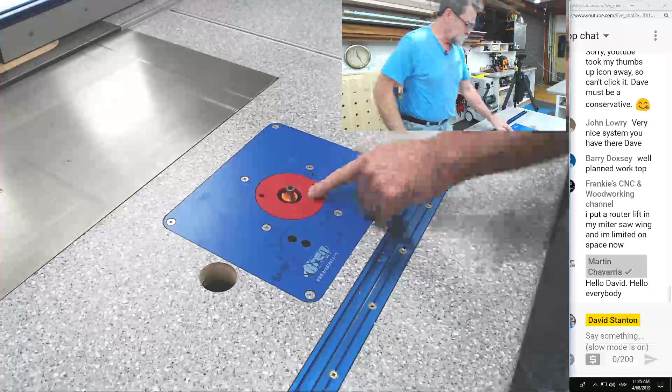So I thought, well, how about we do something that's not going to restrict me? So I came up with the idea of that. And you're going to say, yeah, good on you, Dave. What is that? Well, let me just check that I've got all of the slots cleaned out. Yes, they are. So this is a rotating dust shroud that locks into the top of this. Now, undo that one, take her out, pop this one in, and lock.

Now, that will move wherever I want it to as a dust shroud as I'm putting a large piece over. See how it just moved out of the way then? Wherever I put this, it will follow. So as I'm coming past, beautiful. So the cutter is turning this direction. And you see how when I pushed it up against there, this is following against the edge. So it's restricting the amount of opening. It can go to there, of course, and that would allow a little bit of dust to go out.

But as soon as I move this around, I'm back to there. And how nice is that? So that's one. That's for 180 degrees. Now, the one I'm going to demonstrate on, I thought it might be an idea if instead of just doing 180 degrees, we do one at 120 degrees. Now, the reason that one's there is if I want to go into internal corners. So let's take that out.

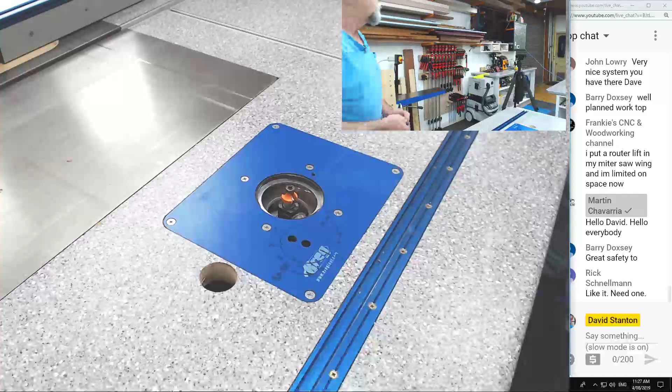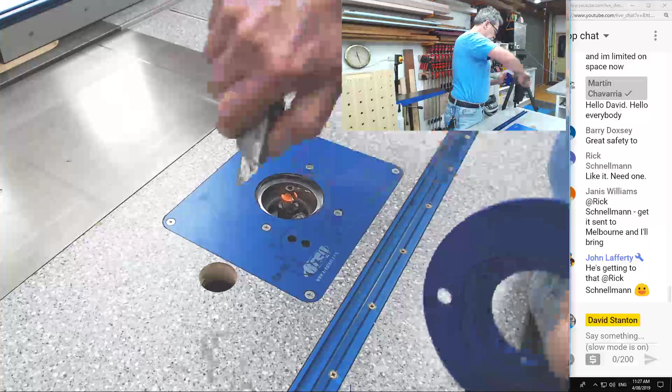And I'm just checking this. Sometimes the printing is leaving, see, just here, you may or may not see it, there's just that little bit of residue from the print left there. And that's fine. I just want to get rid of it. Where's my knife? I'm just going to get a Stanley knife. Got it. Okay. So here we go. As I say, every now and then, with any 3D printing, you might get a little bit of residue in there. That's fine.

So now I can drop that in here, get the clamp or the tool that locks it up, tighten her up. Beautiful. How cool is that?

All right, now, where's that stick that I've got? This is what I'm talking about. 90 degrees. I want to follow there and then back out there. Well, this one would have held me out. There's no way I could have done it. But this one, I can slide in and then back like so. And I'm going to demonstrate it.

So let me get my stuff together here. I've already set that at the right height. I'll make sure that the router is going to work all right. Yes, going to work fine. And how about we turn the dust extractor on in the right area?

Are you enjoying what I'm doing today? Like, I have to apologize for being crook. You know, it's just one of those things I had no control over.

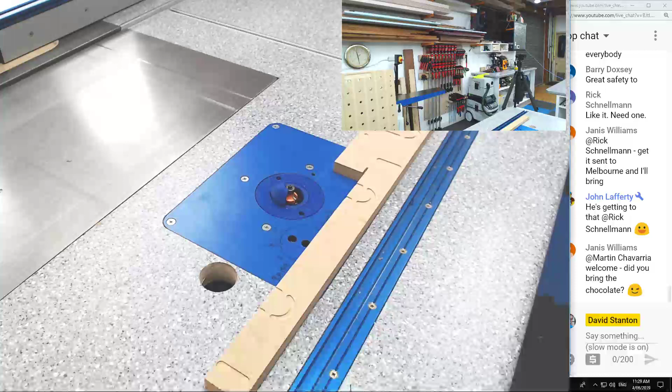I'll make sure that I've got the dust port open there. That's closed. All that's closed. And that one's open. Good. So I'll start up the Dusty, as you know I do with this thing. And I should really have something under that, because that one is open to the cabinet. I'll just check that.

What do we got? Oh, I should have really prepared this, shouldn't I? There we go. I don't know if that's going to go anywhere, but there you go. This one's going to there, and I'll turn the other one on as well. Give me a second. And I think I'll hook into this one, open that, and close that. That should work. Turn her on. Yeah, that's working great. All right. A lot of mucking around, wasn't it?

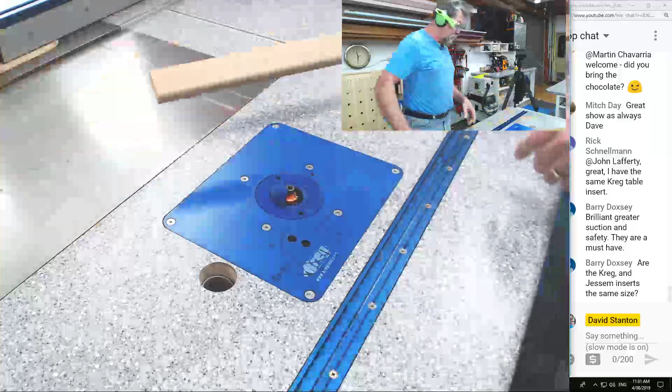Here we go. Put the ear muffs on. Beautiful. Make sure everything's out of the way there. Now, I'll let you know, I haven't used it yet. So this is cool. See how we go. There's the roundover. How nice is that? It works. What can I say? Let's turn some things off.

Beautiful. All right, so now I'm going to spin this around again to there, and hopefully that'll work, and switch the cameras back to the main camera and the chat and do the transition. There you go. Easy, easy, easy little thing.

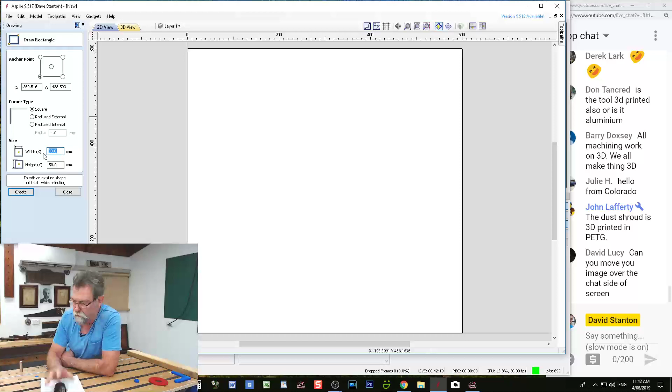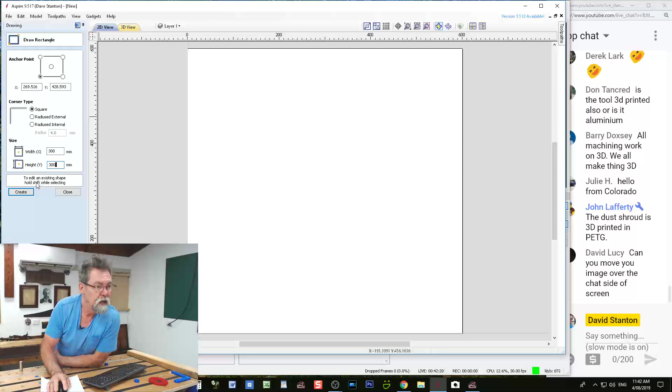Now I want to show you how easy this is. Let's create a rectangle. So I'm going to left click on the mouse, and I'm using a PC, not Apple. So I'm going to left click on create a rectangle, and it's saying all these coordinates that it wants to do it at. I don't want to put it there. I want the rectangle to be, let's say, 300 millimeters wide, and also 300 millimeters high. Okay, and I'm going to click here, and there it is. We'll close that. So now I have this vector, and if I left click anywhere else on the screen,

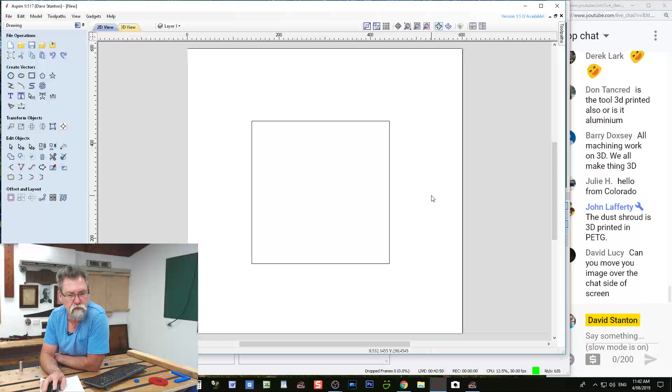And can you move the image over the chat side of the screen? I possibly could, but not right at the moment, David. I've got it set up to run as it is. Can you see it all, or is it not coming through for some strange reason? I wanted to have it so that we had the chat on the right-hand side like normal, and Aspire is still filling everything, and then we've got the picture underneath. It was working earlier when I did a quick recording, so hopefully it works.

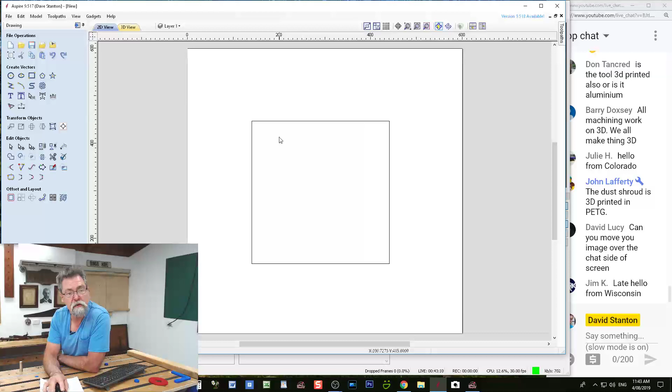So here we go. We've got this square. Now, let me get this back over here again so you can see what I'm talking about. I did mention this circle coming into a rectangle, and that's an awkward one to line up manually to get the vectors to actually lock onto each other.

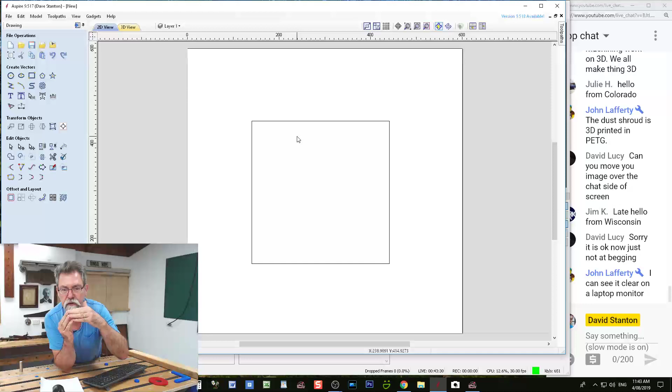It's okay now, just not at the beginning. Okay, not at the beginning. I can see it clear on a laptop monitor. Okay, all good.

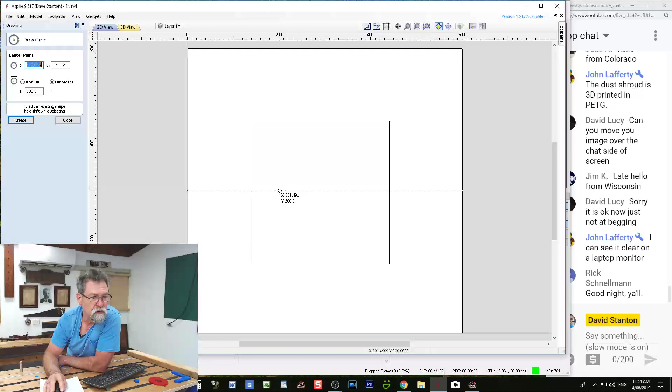So here we go. Now I'm going to create a circle. So left click on the draw a circle tool, and it's got a diameter of 100 millimeters. And again, it's got coordinates there that if I really wanted to be precise, I could use. But what I'm going to do is some smart snapping. I'm going to left click there. Now it's not over far enough, so I'm going to get rid of that and do it again. How I get rid of it is push the delete button, and it's gone. Go back to the circle, and I'm going to come in a little bit closer. Going to click there. Now I've got an intersection. So put the vectors to sleep. So I have a circle and a square.

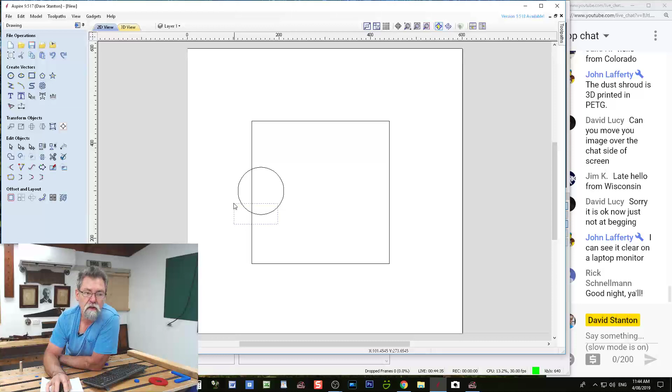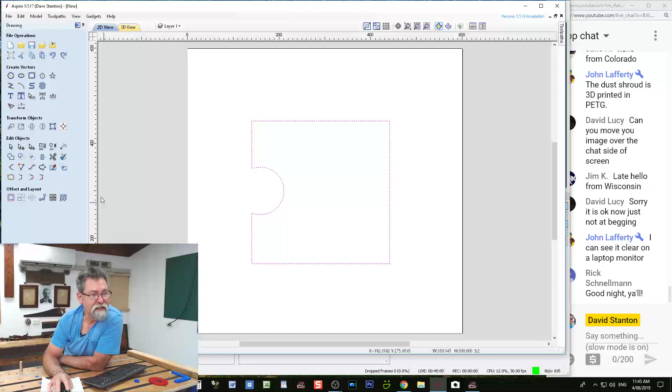I want to create this as one vector. So now what I can do is highlight those two vectors by left clicking from the right and dragging over the two vectors. And so they've both been woken up. Over here, we have subtract second selected vector from the first. If I left click that, it's made that one vector. It's welded it together, got rid of all this other stuff that I didn't want. Okay, now what we're going to do is the tool that I was talking about. This guy down here is the fillet.

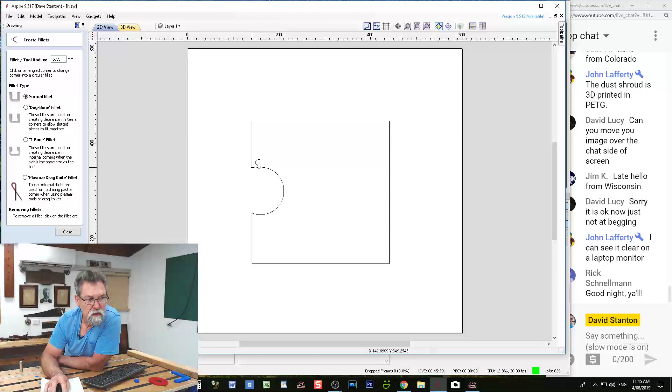I left click on that, and I'm just going to muck around with normal fillets at the moment. So here is the radius. So let's make that, say, 6 millimeters, or 6.35. Let's make it a perfect 1/4 inch, which was the radius that I was using for the router cutter. Now all I do is come down, see that little arrow pops up? How cool is that? Down here till I see the arrow, and there it is.

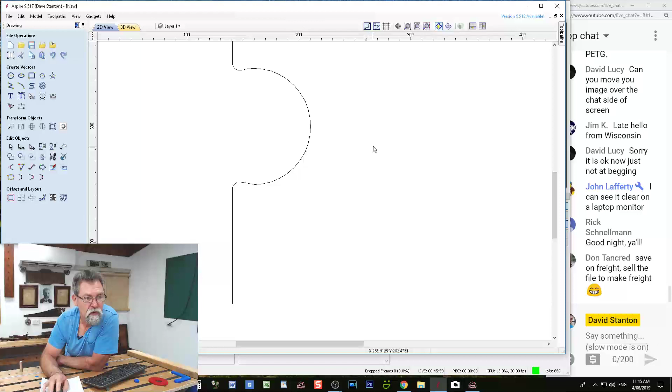Now, I can get rid of it by left clicking again when the cross is on it, and it says, goodbye, I don't want you there anymore. But I can come back and let's put it back on. And we can see when I increase the size of what I'm doing here, that was a whole lot easier than trying to find the tangent and the perpendicular from there and try and get an origin point for a circle there. Fillets are my new best friend.

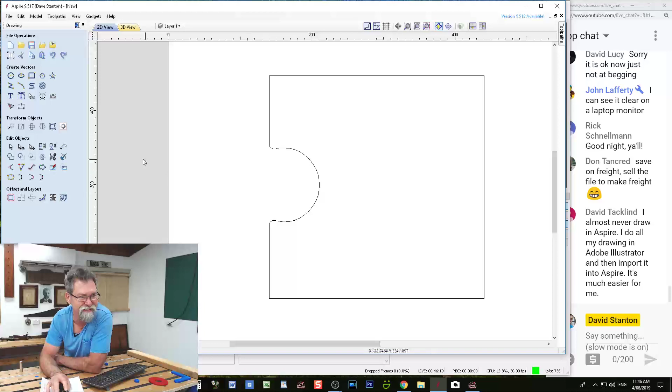So now I want to put a fillet here too, because I'm thinking, you know, that looks okay, but how about we do something of a good size? So let's do something close to 1 inch, 25 millimeters, and then come up to here and say, there's the fillet. Now a lot of people are going to say, you know what? A lot of things,

this is a lot of mucking around, but see, I can now punch this out on the CNC, and I can use that as a template for the traditional way of doing things by cutting it out with a jigsaw or a bandsaw, and then gluing the template or sticking the template down onto my workpiece, which might be 2 inches thick, and then run it over the router table using John's dust shroud with a pattern follower. So double bearing spiral up cutter is what I use for that kind of stuff.

And again, I keep telling people, it is a router. It's a woodworking tool, except instead of doing this, holding on to it, I'm using this and I'm directing the machine to do it via the computer, the stepper motors, and the router there. So it's just a different way. It's still another tool. Okay.

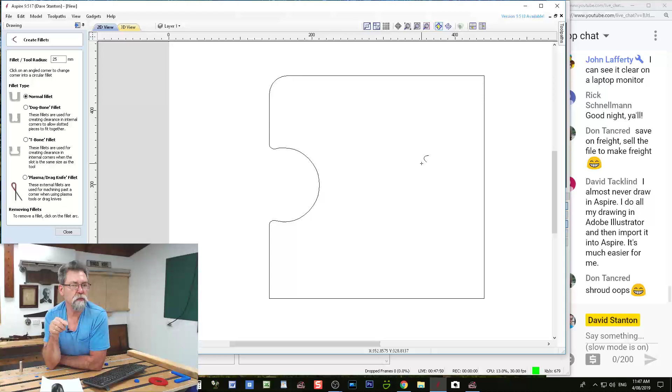All right, I do all my drawings in Adobe Illustrator and then import into Aspire. It's much easier for me. Well, I get that. It's what you're comfortable with. But as I said at the beginning of the show, I was given Aspire by Vectric because I am labeled an influencer. And so this is the thing that I'm learning. So I'm just sharing with you as I'm crawling. I don't learn this very quickly, but it's so much fun learning it.

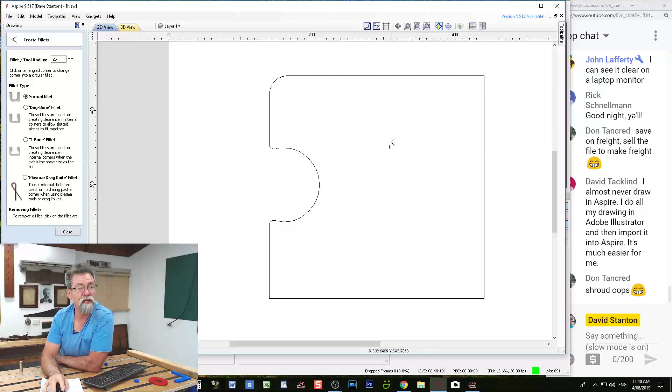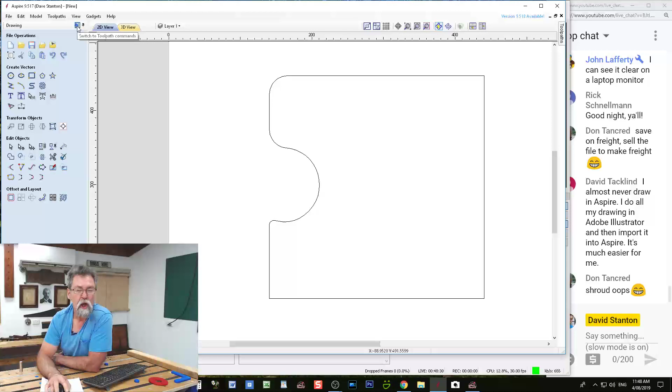All right, let's do another one. Let's get rid of that one and do a monster 25 millimeter there. How cool is that? That was just so easy. Now, let's close. Left click on the close, and we're going to go from CAD, which is computer aided design, over to the other side, which is computer aided machining, CAM. So there we go. This is what's called a vector now. So I have that vector, all continual dotty marching ants lines.

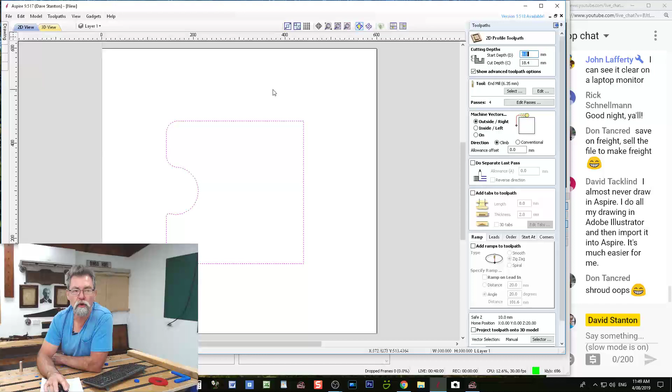And let's say I want to cut it out. So I'm going to left click on a profile toolpath, and I want to go 1/2 millimeter through the job. Remember, this board, my workpiece that I'd be cutting this out of, is 18 millimeters thick. So I've told it to go 18.4, and I'm going to use a 6.35 millimeter cutter, which is a 1/4 inch end mill. Basically, it's a spiral up. And I'm going to cut on the outside of the vector. I'm going to go around the outside.

And I'm going to go in this direction, which is called climbing, not conventional. If I was using a handheld router, I would go this direction because the cutter is turning this direction, pushing into the job. But going climb, what happens is, as I'm going this way, it's wanting to race ahead, but it can't because the machine's got a hold of it.

But it's a much cleaner cut. As the cutter is turning down, it's pulling the timber down into itself. So basically, the job is its own sacrificial piece. It's not tearing out the other side. So this is another advantage of the machine.

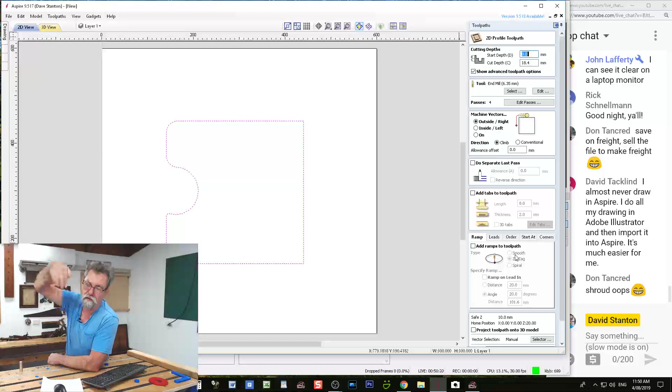So I'm not going to do any offsets. I'm not going to do a separate pass at the end. I'm not going to add any tabs at this stage because this is only a demonstration. I'm not going to ramp it, which means the cutter, instead of just going and then doing a cut, travels in at an angle and then does the circle and then another circle.

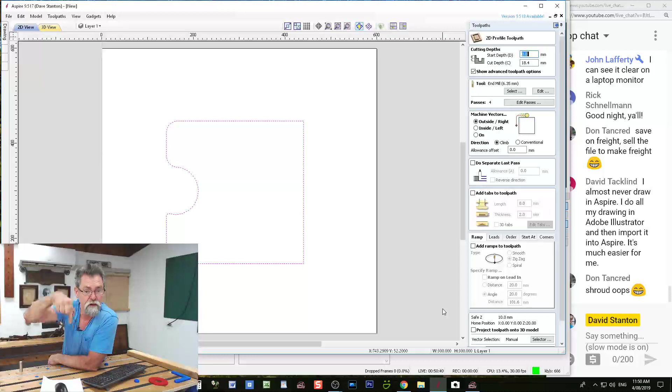I've told it to do 4 passes. Its safe Z position is 10 millimeters above the job, which means the router will come up out of the job and give it 10 millimeters clearance above the job before it moves to the next part to go down, so you don't drag it through and destroy the job.

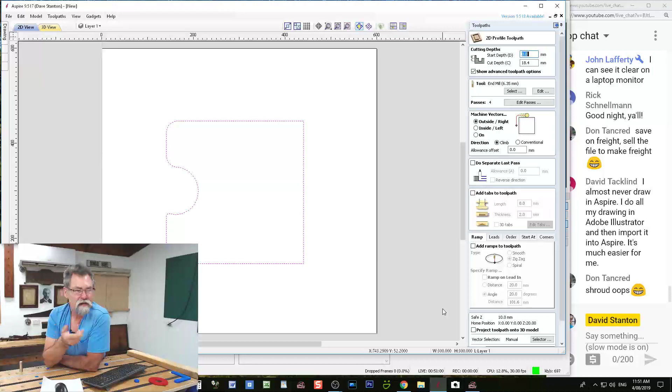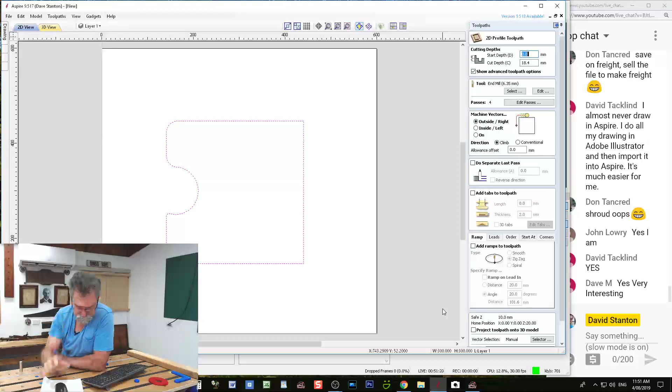Are you finding this interesting? I know some people will be going to sleep and they'll say, this isn't woodworking. I understand that. It's basically going from steam engines to electric. It's progression. Why not? Okay, John, thank you. Okay, David, thank you. As I said, some people will be interested, some people's eyes will glaze over. Like Rick, I think he's gone. He's got no interest in it at all, and I understand. I'm getting a little bit of a leaning kind of mark in my arm. Fun stuff. You're enjoying it, Peter.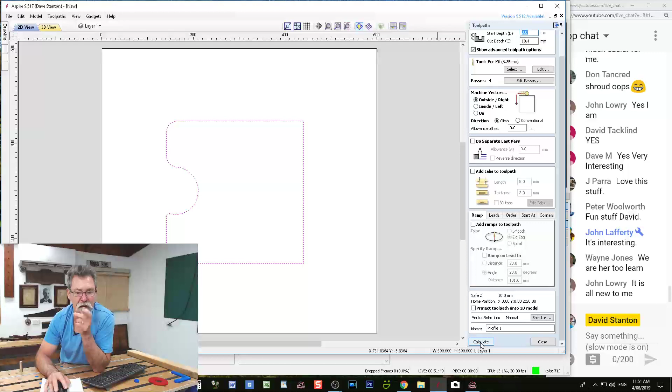Now, well, here's the fun part. I'm going to tell it now that I'm happy with all of that, and to calculate it. When I click the calculate button, it's going to warn me, because I've told it to cut 18.4 millimeters deep, that I'm going to go through the job into my spoil board. This is the base board underneath the job that's on the CNC machine.

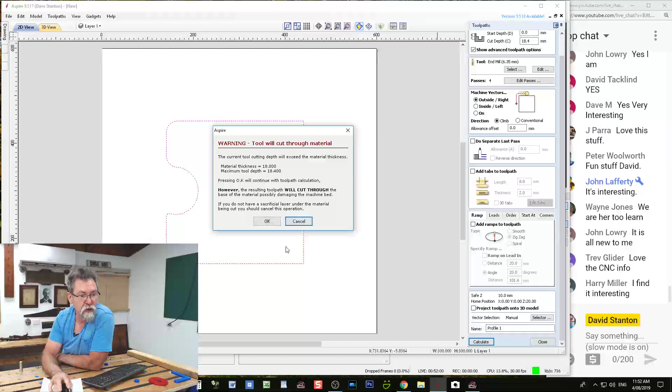Calculate, left click. Straight away, see that? Material thickness 18, maximum tool depth 18.4. Will cut through. And thank you, Aspire. Thank you for letting me know.

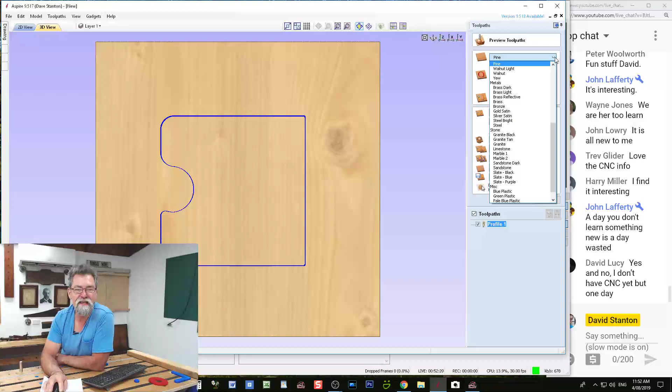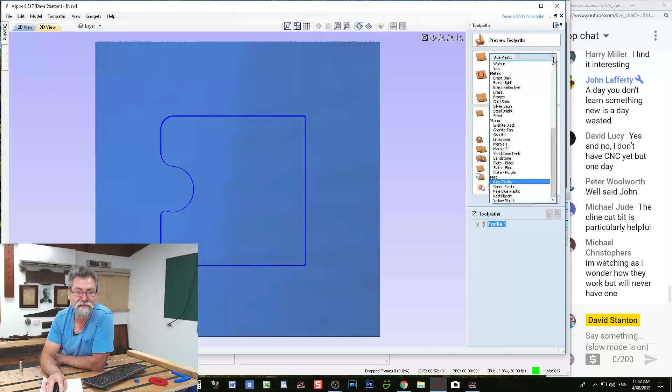Now, I told it to show it up as pine, not MDF. I can select whatever I see it in over here. I could do it in brass if I wanted to, or maybe in granite, or maybe, let's see what else, blue plastic. There's all of these things that it lets me see it in, and it's just fantastic. So I'm going to go back to pine, because pine's pretty easy to see.

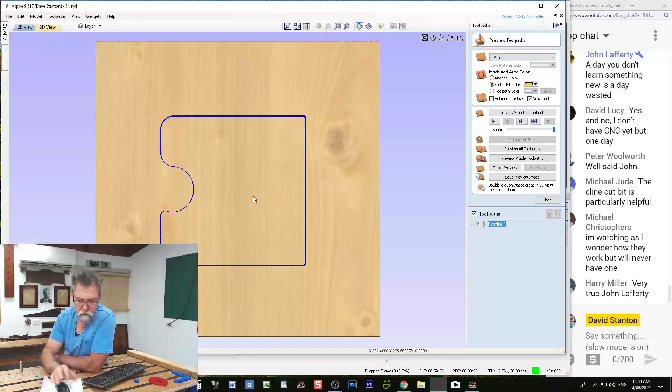Now, I'm going to increase the size of this image a little bit, and I do that by pushing down on the scroll wheel on my mouse and rolling it forwards, and that, per click, makes it larger so I can see it.

I'm watching as I wonder how they work, but we'll never have one. Well, Michael, that's fine. If you're curious about how they work, that's one of the things I do. I love to share information. And if you take something away from today and never get a machine like this, but you go to a show and you see someone with a CNC machine working, you're not going to stand there and be ignorant. You'll be able to look at it and go, I know what's happening here. And that to me is an absolute joy.

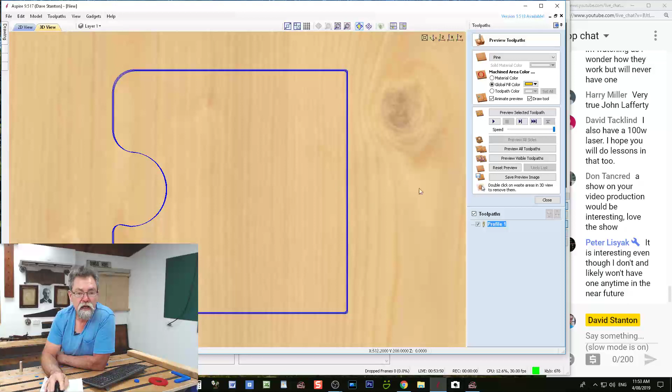It really is. Okay, now, this is the profile, and if I click up here on the left-hand side for the 2-dimensional view instead of a 3-dimensional view, it will show me the toolpath and the direction that the machine is going to travel around the board. It's going to start here and go around this direction. As I said, this is a climbing cut.

Very important. The cutter is turning this direction as it's going along. The job itself is its own sacrificial board. It's cutting back into itself, not pushing it away from the job and tearing out. Little things like this. I love it. Okay, so we can look at that and say that's fine. I'm going to go back to a 3-dimensional view now.

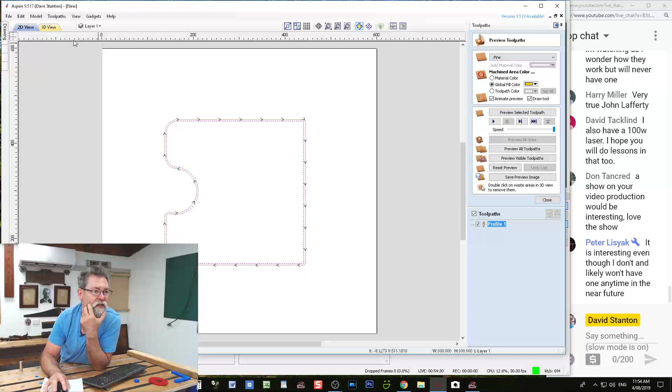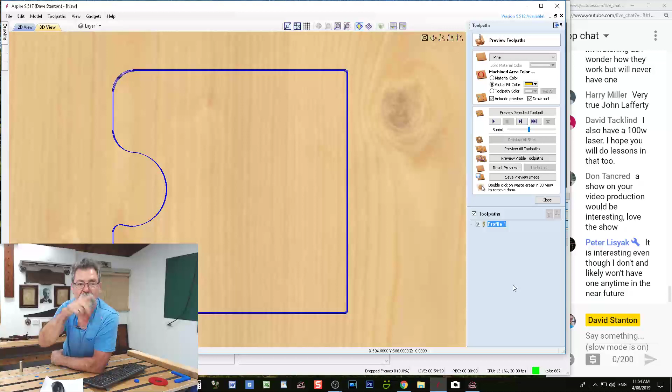And we're going to preview it. And I'm going to slow it down to about there. The reason I do that, otherwise, it's just going to go zzz, and it's finished, and you won't see it. There's going to be 4 passes. It's going to go around, and then right at the end, see how I've got here, the global fill color is yellow. That means if I can see yellow where that blue line is now, or just outside of that blue line, I've cut all the way through. So let's have a watch.

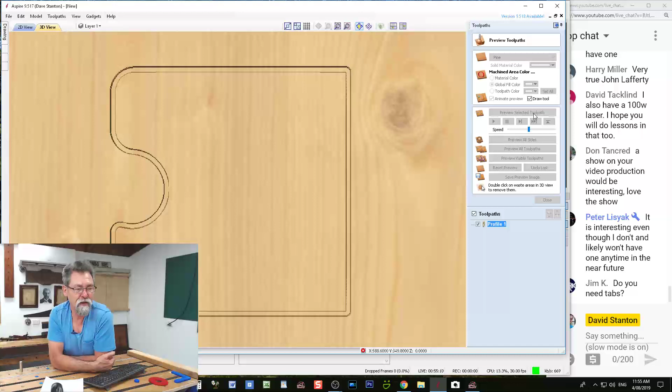This is the router going away. That's the 2nd pass, 3rd pass, and now the last pass. Oh, actually it's not going to show me the global fill color as yellow. It's going to show it as mauve. All right, my bad.

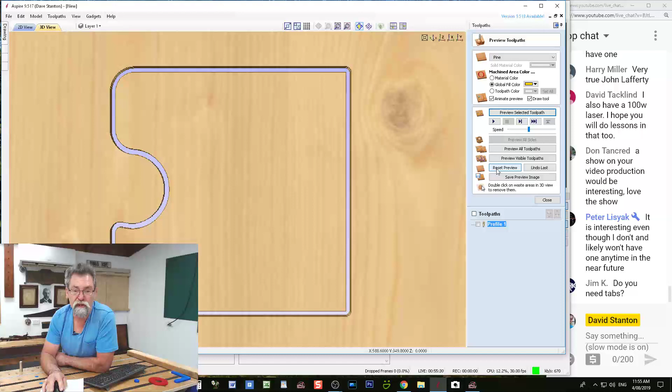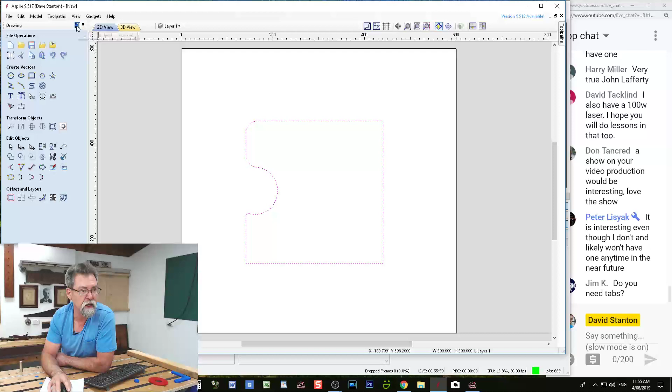Do I need tabs? Let's do that. Let's go back and throw some tabs in. So I'm going to go out of here, back over from computer aided machining to computer aided design. And I'm clicking on the 2D view, and I see everything is good there. And I'm going to go back again over to the machining. And now I'm going to double click this and say add tabs, this area down here.

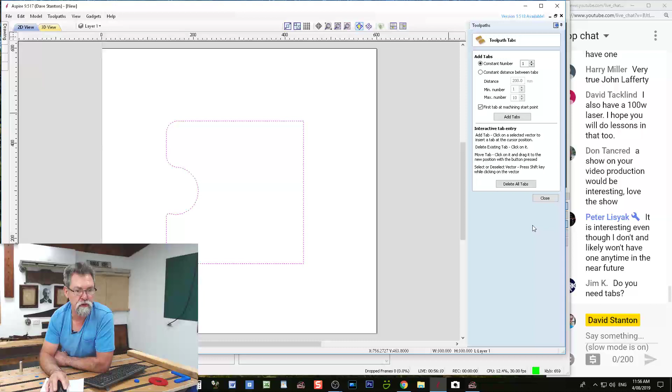Now I'm going to edit the tabs. The tabs are 8mm long by 2mm thick, and they're going to be at the bottom of the trench. So I'm going to add tabs simply by left clicking on the job. I don't like doing it in circles, so I will put it there and there. These are going to leave little areas where it's still going to retain this board inside the job.

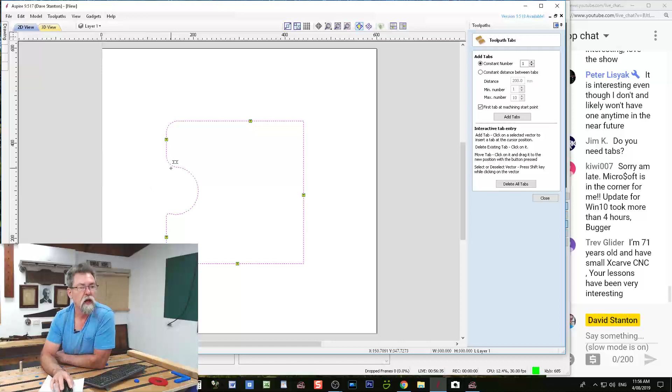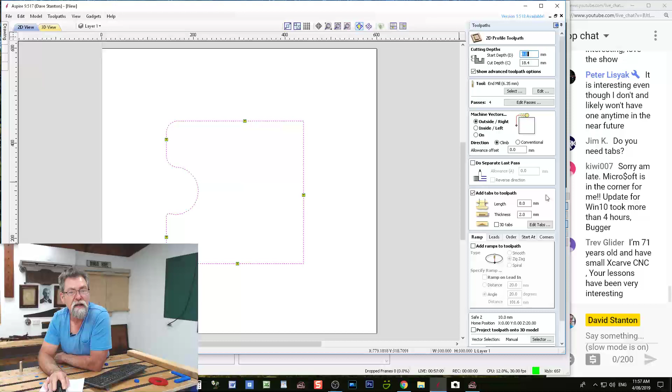I can get rid of the tabs simply by left clicking on a tab and it gets rid of it, same as I did with the fillets. Click on it once to put it there, click on it again to get rid of it. Okay, so 2mm deep. The reason being I'm going to go 0.4 of a millimeter deep past. So my tabs are actually going to be 1.6mm thick by 8mm long. Now let's have a look at that. We'll calculate it and we'll show you. Here we go. Yes, as I just said, I'm going to go through 0.4 more, so it's 1.6mm thick.

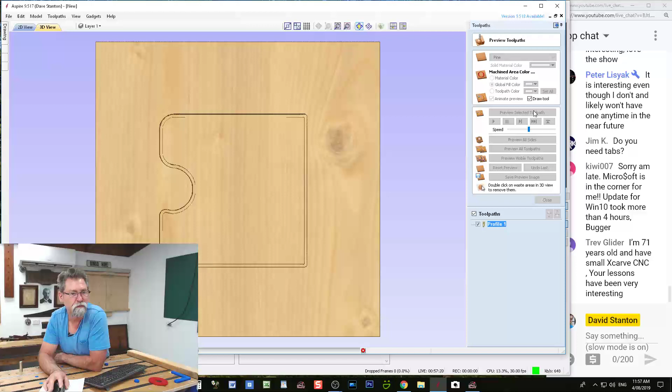And now let's preview. So we're going through and coming up for the last one. And there's tab, tab, tab, tab, and tab. See that? So the tabs are actually yellow. Let's have a look at that. You can see the tabs there.

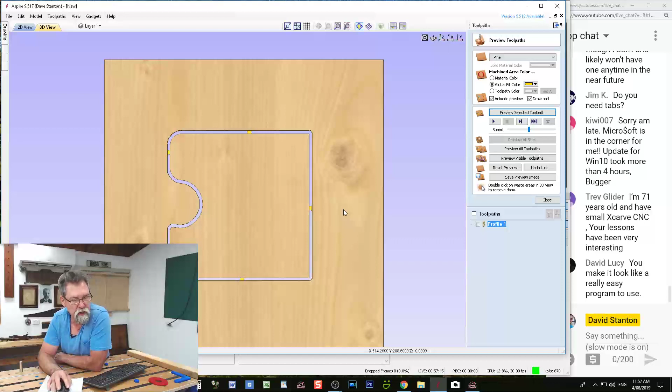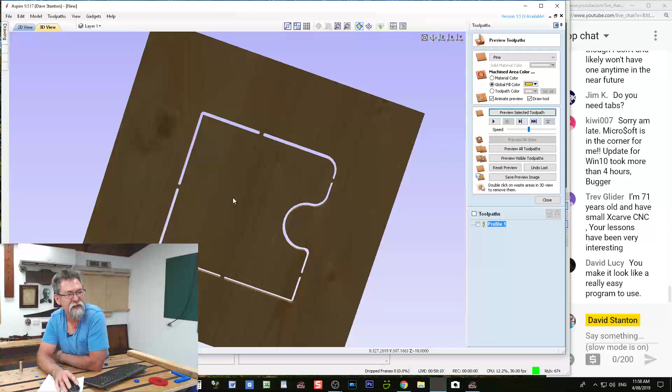Now what I can do also is I can drag back on the scroll wheel on the mouse, and now I'm going to left click the left button on the mouse and hold it down, and I'm going to drag the mouse over left. And you can see what I'm doing is I'm rotating the job over to see from the underside. And about there is fine. And you can see there's the tabs, and that keeps David safe. That stops this thing or the cutter snapping, or this thing becoming a missile and flying across the room and smacking me in the head.

If I want to see what it looks like again from above, this is God's view from the Z-axis. Up here, got Z, X, and Y. So let's have a look from the Z-axis. I'm going to left click on that, and it takes it back to how it looks. I can look at it from the X-axis, which is across the front, and I can look at it from the Y-axis, which is from the side. But that's boring, so let's go back to there. Or this one I think is 3D.

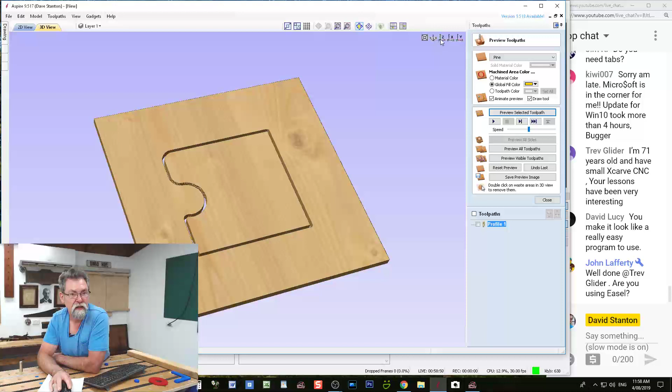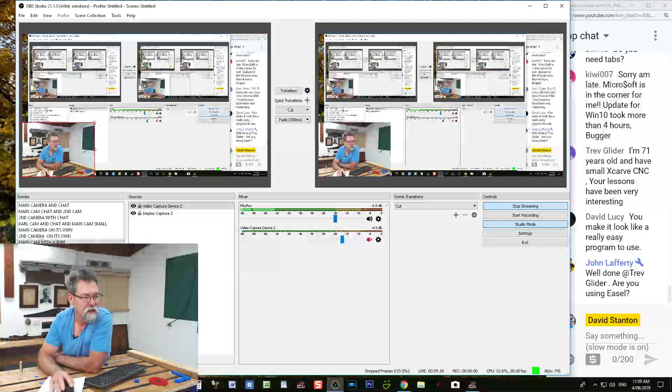How cool is that? And I can actually save this preview image by clicking there, and it'll save it as a JPEG. So there we go. That, my friends, is the end of my little Aspire fun. I don't want to save it. And we'll go back to the main camera here and flick back to there.

So what do you think? I stand up again. It's good fun. As I say, I love these things, you know, and I love the CNC. Again, a year ago, if you said to me, David, I want to talk to you about a CNC machine, I would have run a mile. I used to panic because I didn't know anything about them. And people would come up to me at the store and they'd say, tell me about the CNC. Oh, geez, I don't know. I'll have to get someone for you. Hence, I don't like being ignorant about things. If someone starts talking about something, I like to be able to be involved in the conversation.

Where do I find that program? Ron, if you go to Vectric Limited, VECTRIC.LTD or vectric.com, I think that's it. You can download Aspire and trial it for free for a month.

Now, the thing is, Aspire is not cheap. It's pretty pricey. But the good thing that Vectric do is they sell their programs in modules. So you can buy the desktop version of any of their programs, and the maximum size job you'll be able to do is 600 millimeters by 600 millimeters. You can't go bigger than that. If you want to go bigger than that, you have to buy their pro version.